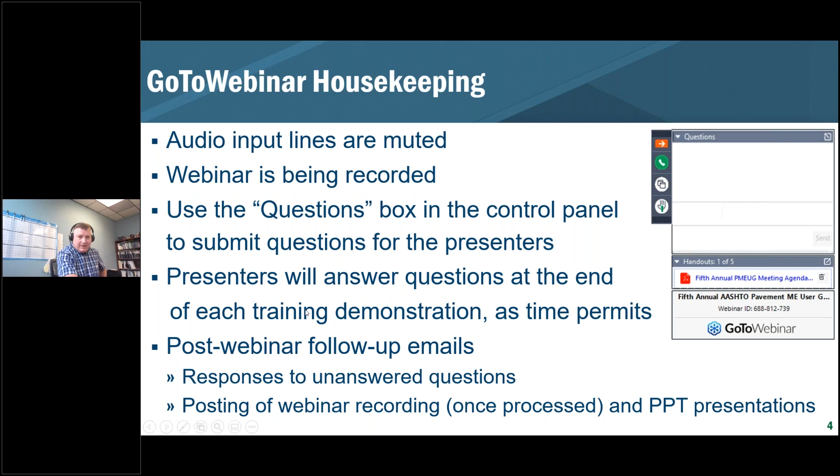All right, do you see my screen yet, Kelly? We see it, yep. All right everyone, I'm going to turn off my webcam just to save some bandwidth. I'm a little slow these days on that, so I'll be back.

What I wanted to do is go through and, as Kelly noted, highlight using the Pavement ME design procedure to look at cold in-place recycling as well as full depth recycling, full depth reclamation.

As we know, going through the asphalt overlay options, we'll be taking a look at the existing asphalt pavement, both a flexible and a semi-rigid type of process. I'm not going to get deep into the technology itself, the whole cold in place recycling process or the full depth reclamation process, but I want to cover some terminology and verbiage that we'll be using in a couple different places through the presentation.

Cold in place recycling is the recycling of the asphalt layers, typically to a depth of 3 to 6 inches. A train comes along, mills up the material, puts it through some type of a pug mill process, and then lays it down with a paver.

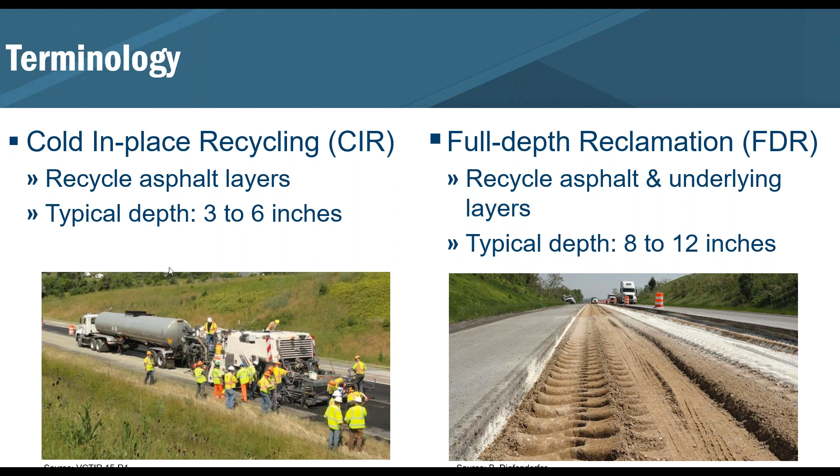The third one we'll be using is the cold central plant recycling, or CCPR. This is the classic process: do the milling, take the asphalt millings to the plant, go through processing, add materials or binder or do something to that material, and then bring it back out onto the project site and lay it down with a normal asphalt paver. So those are the three terminologies we'll be using through the presentation. I won't get into a deep dive, but there's certainly a lot of information out there for anybody wanting to know more about that technology.

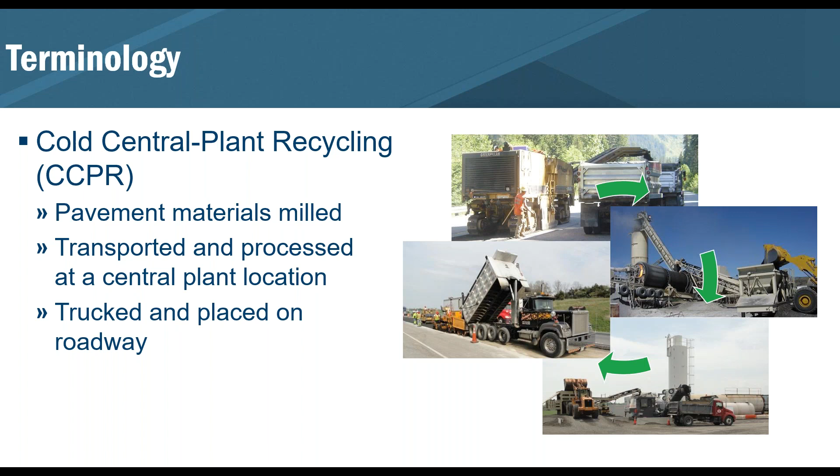As Kelly already noted, both Brian Diefenderfer and Hari Nair gave us a lot of information. Hari provided us with the DGPX files that he did as part of version 2.2 with Pavement ME, so there'll be a little bit of difference here, and I'll show you that in a minute. They also provided the Virginia DOT Pavement ME user manual they developed back in 2017, as well as Brian's report on the I-81 recycling project, which we'll use as our case study in this evaluation process.

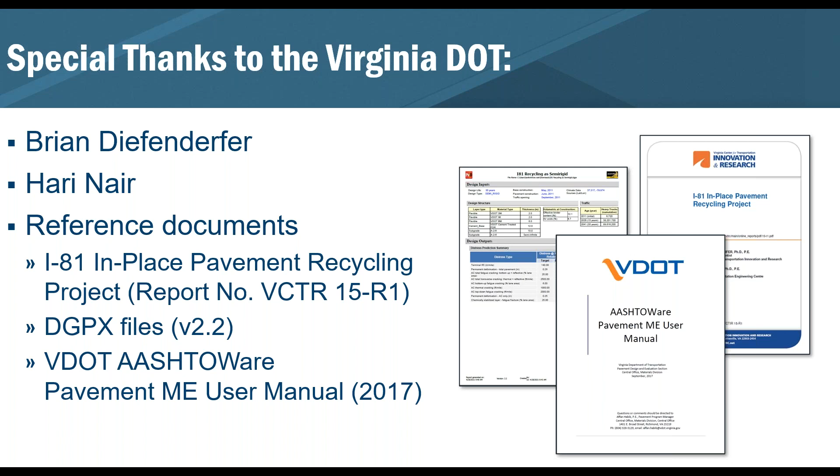With that, we'll dive right into the project itself. It's on Virginia Interstate 81, southbound lanes only. It's a rural interstate, four-lane divided, with pretty narrow inside shoulders and typical 8 to 10 foot outside shoulders. As noted, this is a recycling research project because the Virginia DOT wanted to look into the benefits, practices, and performance of all three: FDR, CIR, as well as CCPR.

This recycling research study was done in 2011, so that gives us some benefit, especially coming on the outside end, being able to compare how Pavement ME actually was able to predict performance, or how the current performance compares to the predicted performance. I've got a couple slides on that to show you as well.

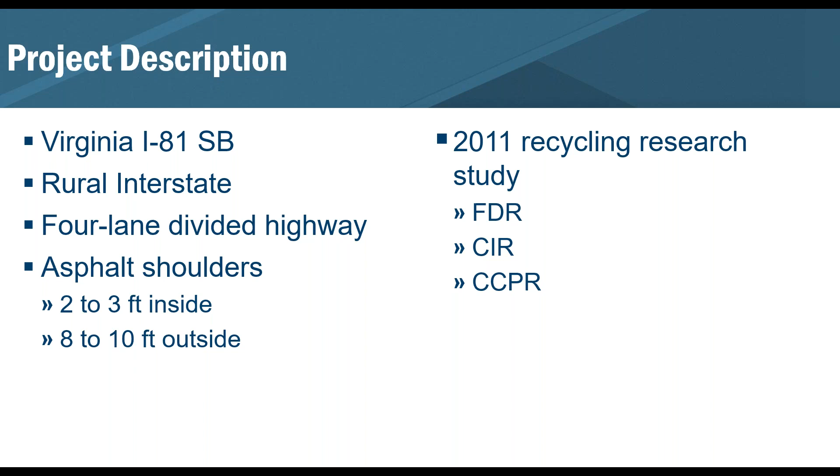The project location is just west of Richmond, over by the city pronounced Staunton - not sure if that's how it is, so excuse me for anybody on the East Coast. It's on I-81, running just outside the town, so kind of close in but still pretty rural. Here's a shot of the typical roadway configuration: you can see the asphalt narrow shoulders on the left, pretty standard on the right, a divided highway in a pretty rural setting.

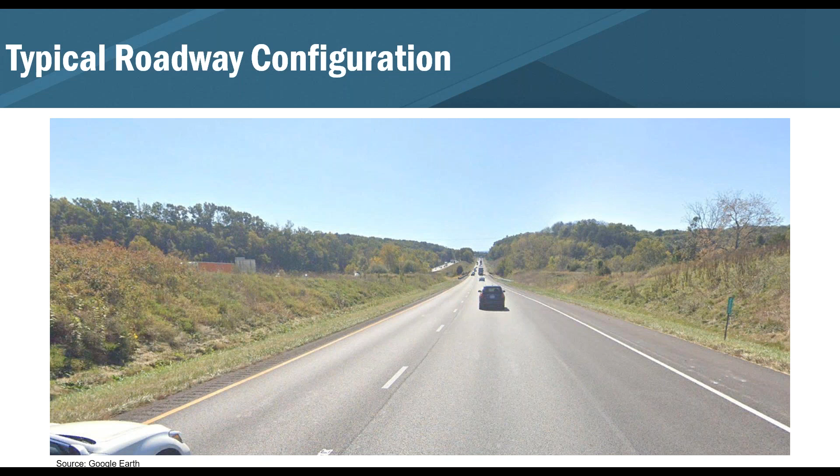Some of the existing conditions: the pavement itself was about 10 to 11 inches of asphalt sitting on top of about 6.5 inches of aggregate base. Back in 2011, there were about 13,000 trucks, both two-way, and about 90% of the trucks were in that design lane.

Based on the evaluation that the Virginia DOT did, they were having some pretty recurring structural issues with this section of highway. They had a lot of deep patching, a lot of mills and inlays, and it was kind of perpetual - they would fix one, come back and have to fix another section. So it was a reoccurring issue, and they decided on the project level evaluation that this section of roadway really was a candidate for reconstruction.

Here are some looks at the typical distress prior to the rehabilitation, back in 2011. You can see a patch on the left that has a series of potholes in it, with quite a bit of fatigue cracking in the patch as well. The image on the right - I thought, wait a minute, that's like a mill and inlay, but now it's actually a patch of a patch type of thing. You can see the fatigue cracking coming up pretty nicely in the right wheel path, and actually showing some staining, so we're getting some fine material coming up through the subgrade. That means you're pretty guaranteed those fatigue cracks run through the entire depth of the asphalt layer.

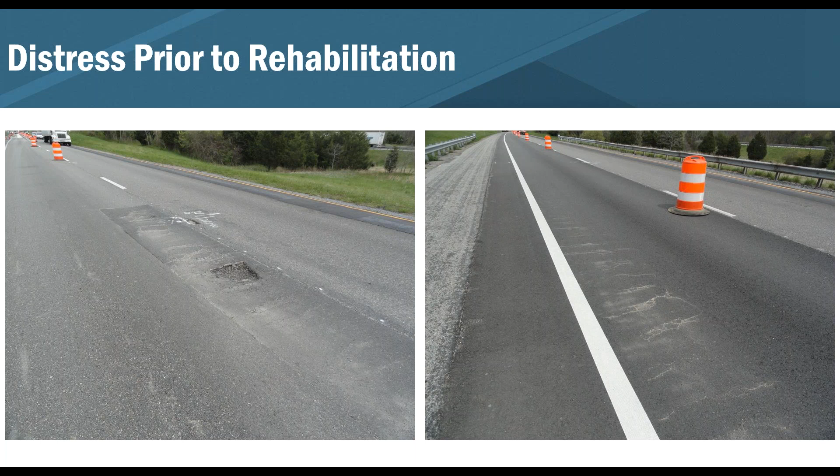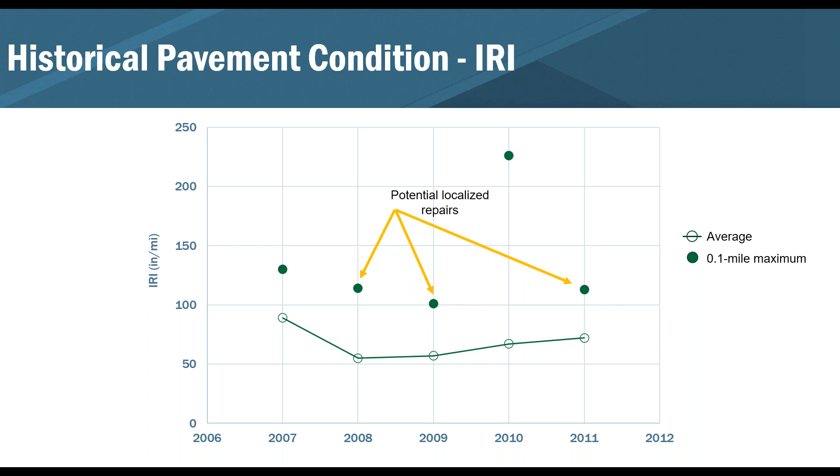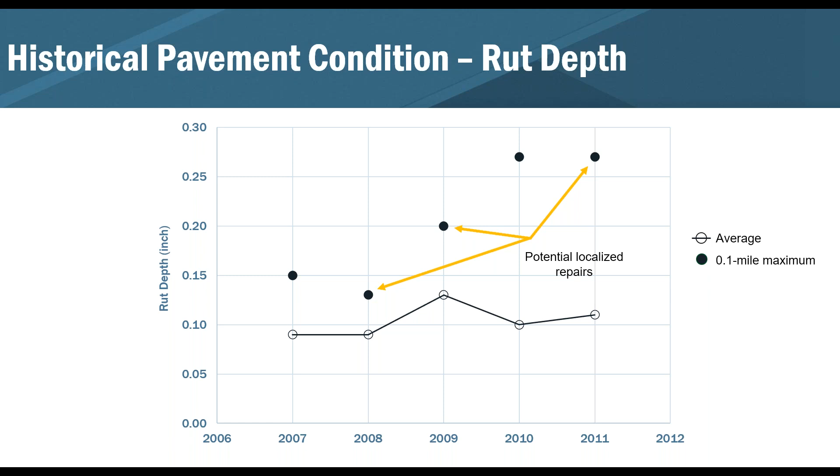And then finally, looking at patching and cracking, this one gets a little bit more messy. But the patching are the circles, and the alligator cracking are the triangles. Again, the marker filled with a color is actually the maximum value, and then the dashed line and the solid green line was the average value.

So again, you can kind of see that for the most part, the alligator cracking on average wasn't terribly bad - maybe gets up to a couple percent over the years, but certainly the maximum at one location in 2011 was above 10%, a little bit closer to maybe 12, 13%. Then again, the patching - you can see quite a bit of patching happened in 2007. They went through and did some repairs, and that drops and kind of fluctuates a little bit more so, depending on what they did.

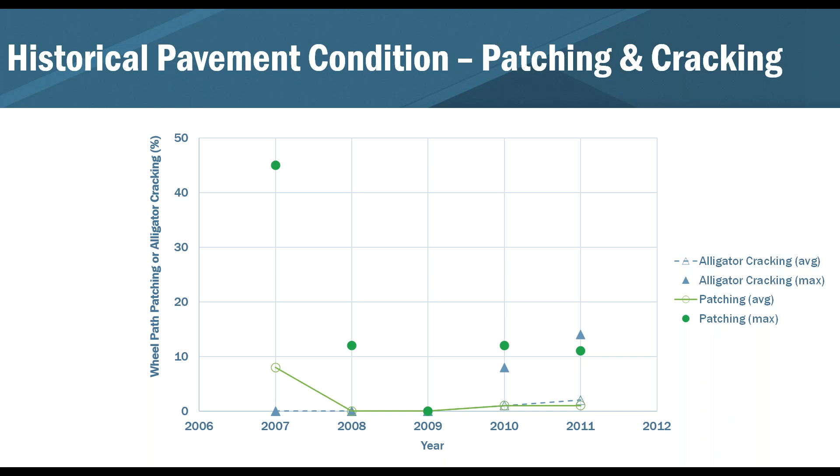All right, so let's dive a little bit into the Pavement ME inputs. This is some of the information that Hari had provided in his version 2.2 analysis of PMEd, where looking at also the Virginia DOT identifies the reliability values they use, much like everybody on functional class, where the interstate would be 95%, and then you can kind of see how it reduces depending on that down to secondary at 80% reliability.

They also make a note in their manual that, hey, if you're going to use FDR, go ahead and take a look at the 50% reliability. And so even though I'll show you at 95, I'll also provide that information at 50%, just so you can see how the analysis happens.

The other thing is that the Virginia DOT pretty much just takes a look at the bottom-up fatigue cracking and the total pavement permanent deformation as the criteria that they're going by. Obviously they're looking at it all, but they're really kind of focusing on making sure that they meet those two criteria in the analysis process.

Now, one thing that we did here, we did have a version 2.3.1, and so even though Hari had done it under version 2.2, the analysis that I'm going to show you is based on version 2.3. The 2.2 file format doesn't work in version 2.6, and so Kelly was gracious enough to do all the runs for me because he had an active version 2.3, and so that's what we used through the analysis.

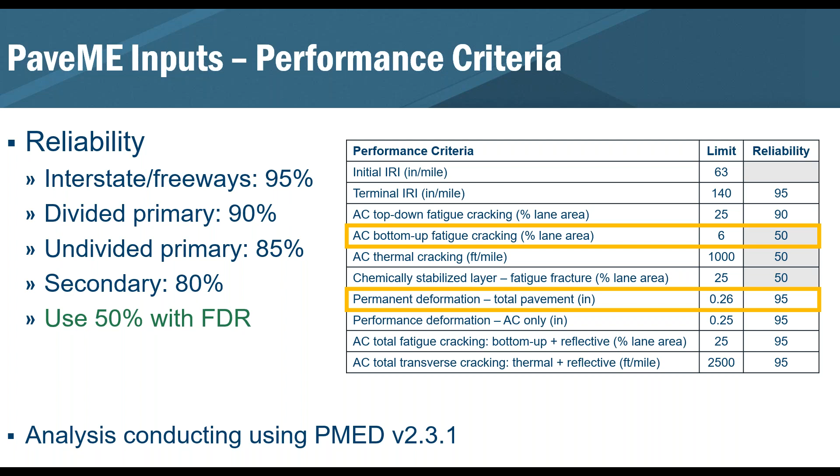So again, as before, we're going to show you more screenshots of the software, with a bit more discussion on the results. Hopefully anybody needing training on how to operate the software can go check out AASHTO, where there are a lot of videos you can download if you want to know how to run the software. That's something we've tended to do in previous years, as well as in this session and the last one.

So this is just the standard. Virginia DOT has vehicle class distribution by project, axles per truck by project, and all the average annual daily truck traffic information is something they put in, and everything else they use a default value. So that was the whole point of showing you that screen.

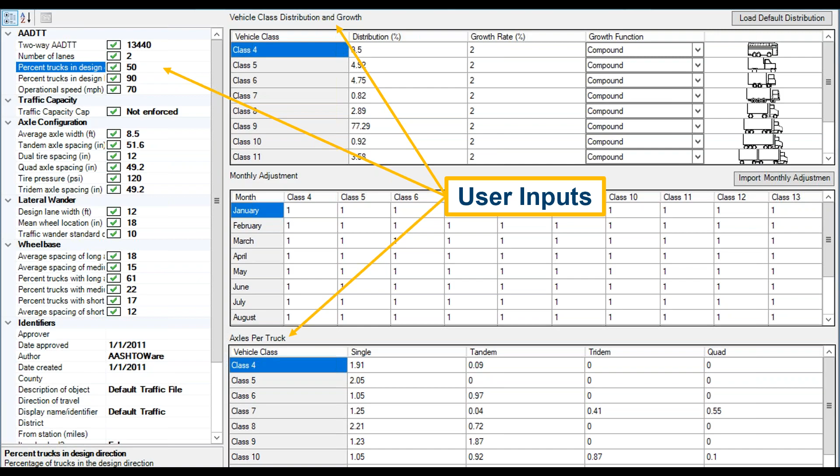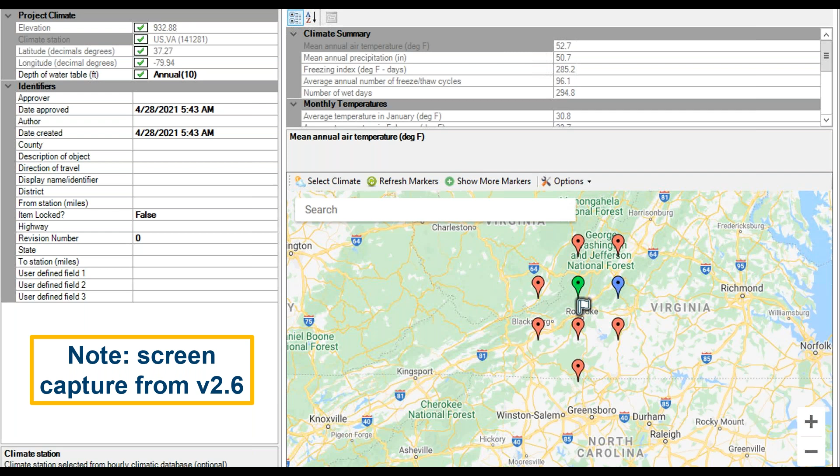The project location, like I said, is over in the Roanoke area, maybe by that little flag on the screen. This is not from version 2.3.1, but a screenshot from version 2.6, just to show you some of the climate summary information, more so than what they show in version 2.3, because I think in that version the map isn't there. I just wanted to show where it's located, so we get a good sense of where we're at.

All right, for the analysis of the FDR, there are a couple of different options you could do. You can design it as a semi-rigid layer, or you can design it as a stiff unbound layer. I'm going to go through both of those processes in the next couple of slides.

But before we do that, we have a poll question for everybody. Prashant or Kelly, if you guys could pull up that poll.

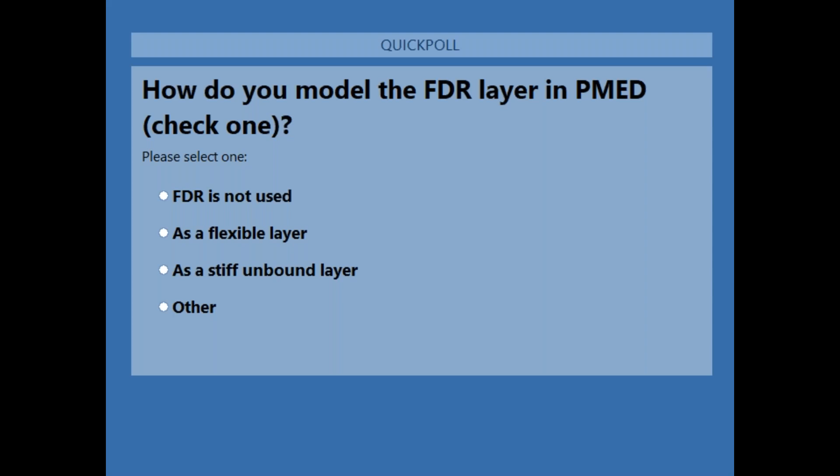And Kelly, I can't see anything. Oh, I was just going to say, it is being shown, and people are encouraged to respond to the question shown. Again, just wanted to see what everybody is using in regards to the FDR layer in PMED. So make your voices heard. Prashant, are we getting some good feedback? Yeah, we are at about 65% response rate, so I'm going to give it 5 more seconds and then close it, and then I'll show the responses. Great. And can you see the results, Linda? I can. Okay, I'll let you go through it a bit if you want.

Okay, great. Thank you everybody for responding. It looks like about 22% of you say that you do not use full depth reclamation. About 38% model it as a stiff unbound layer, 28% as a flexible layer, and 12% as other. So that'll be kind of interesting. That's some good information.

Thank you, Prashant. Thank you, Kelly. So let's dive into using FDR as a semi-rigid layer.

So the pavement section that we're going to evaluate is a 2-inch SMA, 4 inches of surface mix. Then Virginia put in—they recycled 6 inches of the material for the CCPR. So they hauled it off, recycled it, brought it back, and modeled that as an asphalt layer, but as a base mix, one of their asphalt base mix layers. There is the recycled 12-inch FDR.

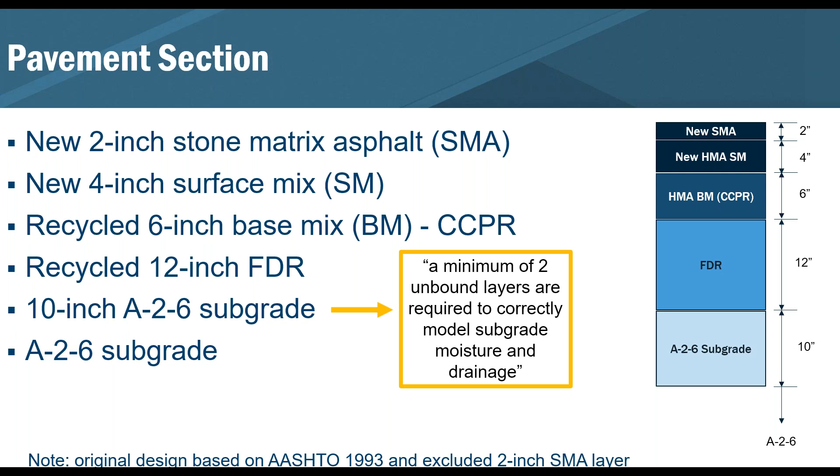All right, so we're able to have Virginia send us material properties. We have level 1 material properties for the asphalt, the CCPR layer, as well as the FDR layer. This is to show you those inputs for the binder test and for the dynamic modulus, and you can kind of see the stiffness values there.

So it's good information. If you've got level 1, use level 1 - that's always been the case that everybody has been supporting. So since we had that data, obviously we're going to use it.

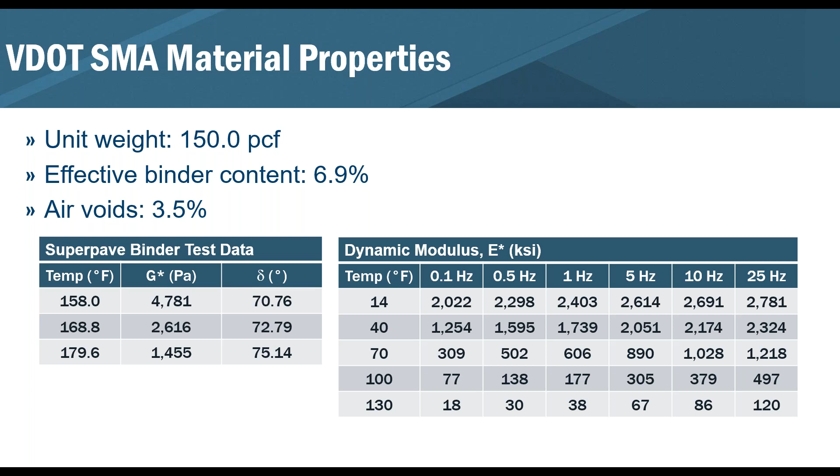Similar on the surface mix layer, we've got pretty good values there for that - 12% binder content, 6.7% air voids, and then obviously the binder test and the dynamic modulus test results.

Then on the CCPR layer, same thing here. Now the effective binder content drops down to 9.8 with the air voids at 6.3, and again still showing pretty nice results. The dynamic modulus itself is still looking relatively good compared to the other two as well.

For the FDR layer, we went through looking at different inputs, and pretty much the DOT uses an elastic resilient modulus of about 7,500 KSI, or 750 KSI - this is straight from what Virginia does. But the ACPA, the PCA, and the National Ready Mix actually have a program, pavementdesigner.org, where you can get it, and they suggest 600 KSI. So for anybody not really knowing how to characterize that, certainly the 600 KSI is a good place to start for those values.

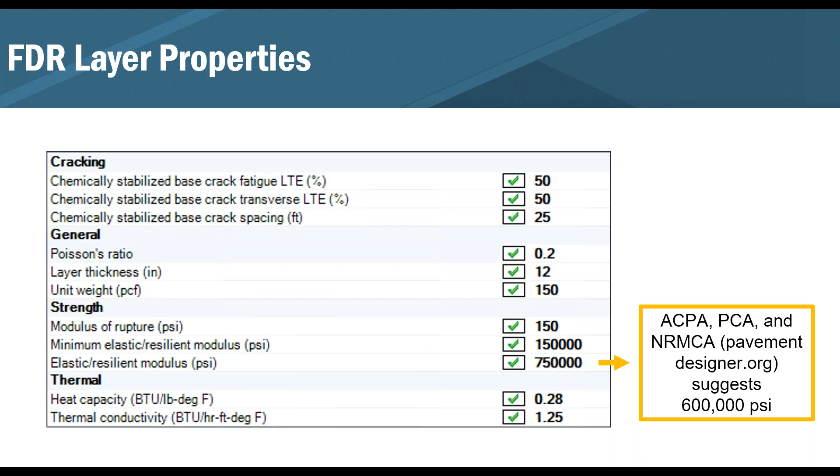On the subgrade side, we had to take off that top 10 inches of the subgrade layer so we can get the PMED to run, but you can see that everything is exactly the same - really it's just 10 inches. Poisson's ratio is the same as the subgrade, stiffness is about 16,000 psi, and it's an A-2-6 soil. Again, that's just to get the program to run, not necessarily that you're actually building a separate layer.

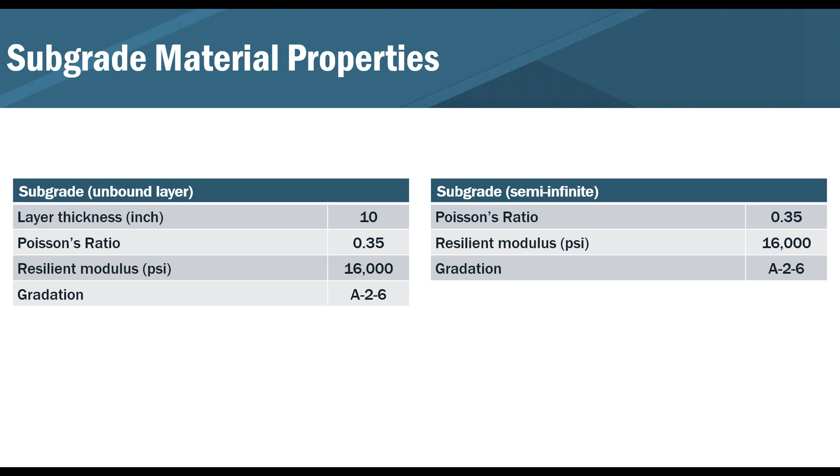All right, so some of the results, looking at it as a semi-rigid pavement for the FDR, looking at the predicted values at 95% reliability. Kind of missing out on the IRI - it's quite high. But if we focus on what Virginia DOT is looking at, it's the rut depth, and at this pace it's about twice what they're wanting it to be. But if you look at it at 50%, the rut depth is only 0.26, which does pass the reliability value at that level.

Also, the bottom-up fatigue cracking passes - it's actually quite low. Target is 6, and the predicted value is only 4.3. And then looking at it, the majority of the total asphalt rutting is predominantly what's driving the total rutting. So it's all pretty much in the asphalt layers, and very little of it is in the underlying layers.

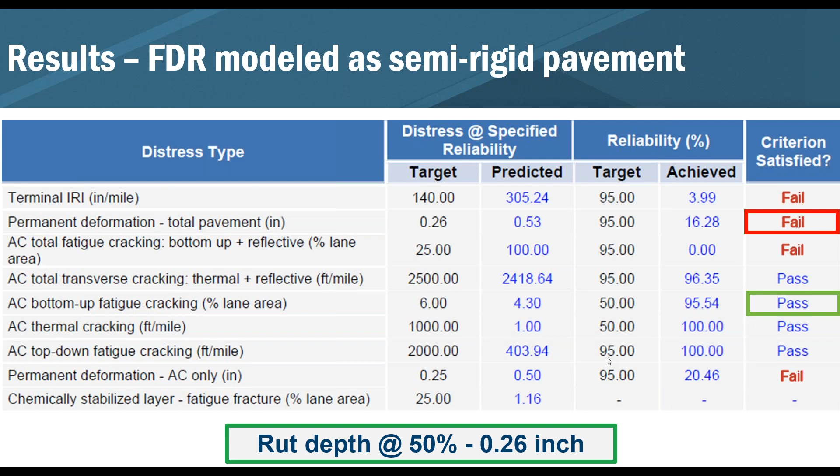All right, so now looking at it as a stiff unbound layer, and I'll do some comparisons at the end as well - kind of a similar type of structure. Again, 2 inches of the SMA, 4 inches of the asphalt surface mix. The recycled layer is still an asphalt base material. Now we're going to model that 12 inches of FDR as a high modulus unbound aggregate layer, sitting on top of the A-2-6 subgrade.

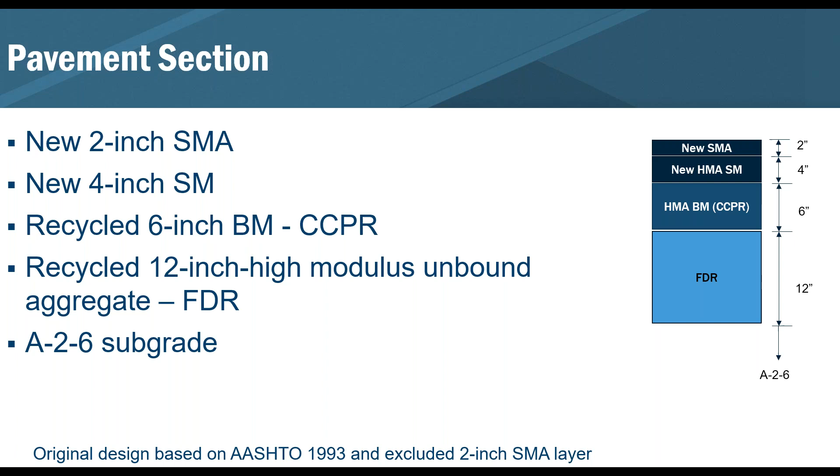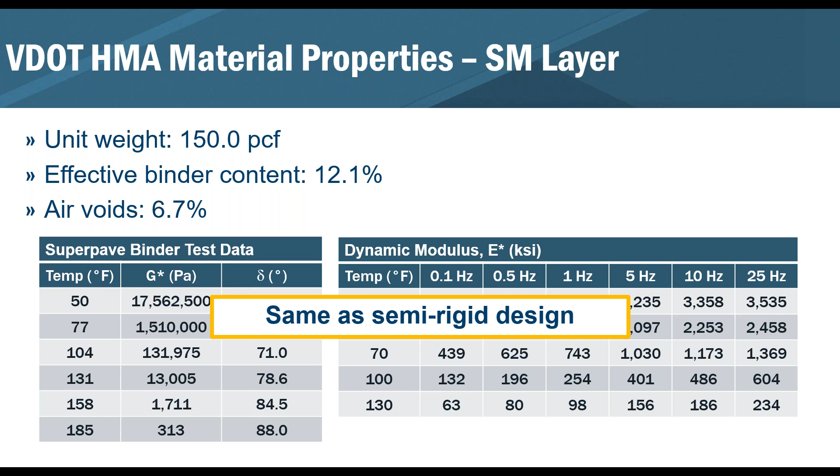Won't bore you again with the same details, but the SMA material doesn't change, the HMA surface mix layer doesn't change, the CCPR layer we're using the same stuff. But now on that FDR layer, we're using a Poisson's ratio of about 0.35, putting in 80,000 psi for its resilient modulus, and making it an A-1-A soil, just to give it a little bit more unbound characteristics. But it's probably not statistically different from just running it as the regular A-2 soil that was before.

The results from that analysis showed that the predicted IRI actually dropped quite a bit, but certainly the permanent deformation is still failing. It's actually the same as it was for the 95% as it was previously, but at 50% reliability, it's a little higher at 0.36.

And certainly the bottom-up fatigue cracking again is failing - even though it's barely failing, it's 6.1 or 6.2% predicted versus the 6% target. But at 50% reliability, it does pass with only 4.3% fatigue cracking. And again, same thing here, the majority of the predicted permanent deformation is occurring in the asphalt layer, with very little of it happening in the underlying layers.

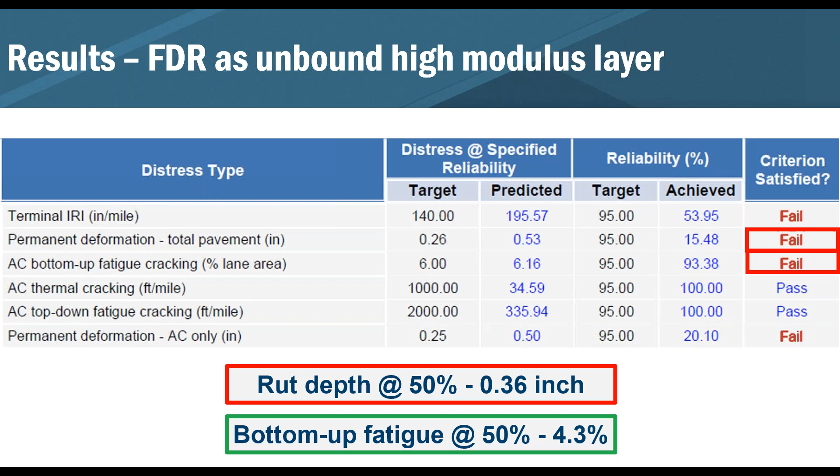So I don't think that's anything surprising from what we know happens. So here's this comparison of the analysis, again just doing the side by side.

With the unbound layer, there is no bottom-up plus reflective cracking, or thermal plus reflective cracking, or fatigue fracture of the cement stabilized layer. So that's why there's an NA in that column. But you can see where I showed before that the terminal IRI is different between the two, and certainly it is impacted by the reflective cracking, because some of that information is coming through. The target was 25 for the FDR as a semi-rigid layer, but actually it predicted 100, so all of the cracking coming through is being mostly driven by the reflective cracking.

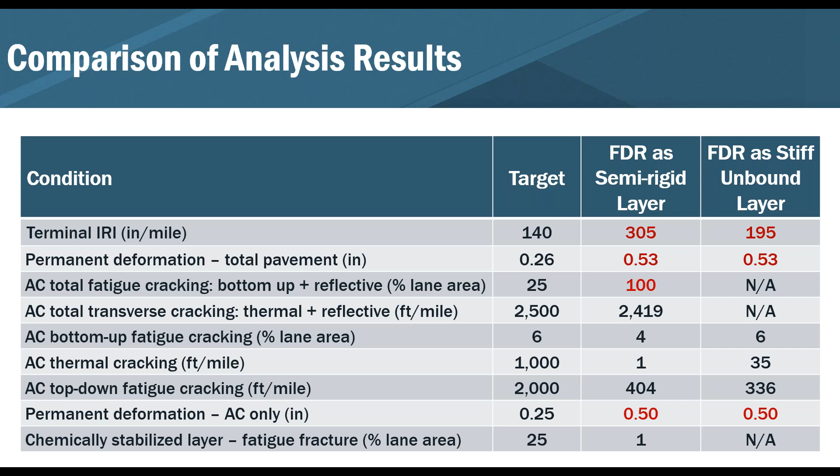The great thing about having this project built in 2011 is that while the PMED analysis was obviously done recently, we do have measured data. Hari was able to send me information related to IRI, rutting, as well as fatigue cracking. So the benefit, of course, is you can now compare the prediction versus the measured. But also the challenge, as you see here, is trying to figure out what happened, and how well the measured fits the predicted.

I'm going to show you these. The next 3 slides are all the same in that the measured is lower than the predicted, and there's probably a whole bunch of reasons why that is true. But I think that would probably take a whole other training session on calibration and application of results, and whether or not this needs a more forensic type investigation to determine the cause. There's a couple reasons that there could be this divergence between measured and predicted, but we can dive into that maybe at a later date.

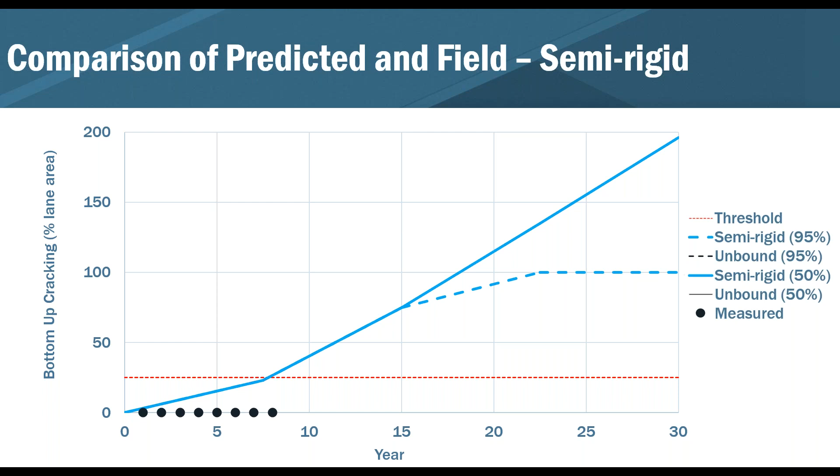So this is for the semi-rigid case. For the unbound case, it's slightly different in that the bottom-up cracking is completely related to fatigue. There is no reflection portion of this. And you can see, again, even though the bottom-up cracking is lower, it's still slightly higher, twice as high I guess, than what is actually being measured. So again, that's something to look into, to see how come that's not tracking as well as we would hope it to be.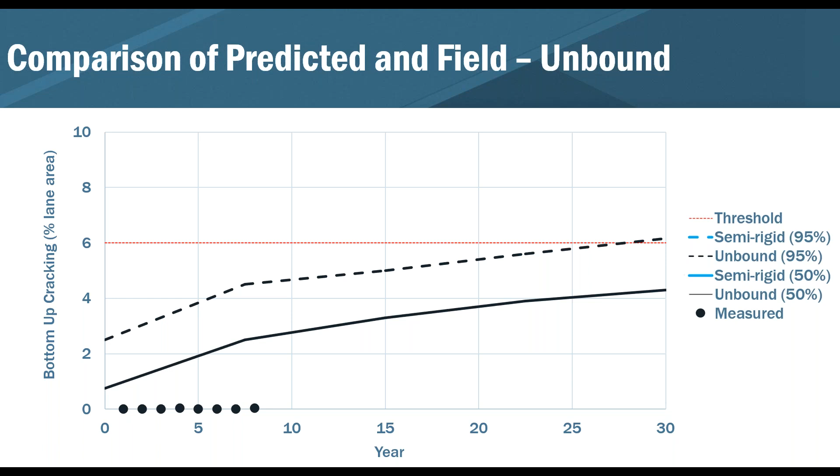All right, so having the ability to run the most current version of PMed, I went ahead and did that this morning, so this is hot off the presses. I used version 2.6. I went ahead and evaluated one case modeling the FDR as a stiff unbound layer, using the global calibration coefficients.

I should have mentioned that with version 2.2 from Hari, and version 2.3, all the runs we did actually used the Virginia DOT calibration coefficients. So now going into version 2.6, those calibration coefficients no longer are the same. So I just went ahead and abandoned all the calibration coefficients we received from Hari and went with the global calibration coefficients for version 2.6.

So is it a direct comparison? No, because it's not calibrated to Virginia conditions. But I think it gives us a sense of what the new version looks like, how the new version would perform in this analysis.

So for version 2.3, I put both the 50% reliability and 95% reliability, and the same for 2.6, so you can see that here. Since there is no reflective cracking in the unbound layer, you don't see that here. I'm also only showing information on the 50% for the 3 criteria I used on those graphs I just showed - IRI, permanent deformation, and bottom-up fatigue cracking.

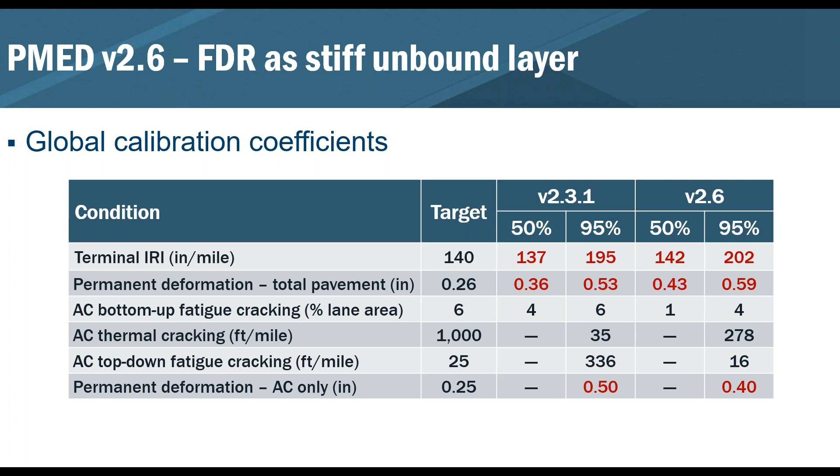All right, now I'm going to dive into the evaluation of a cold in place recycle project, but I'm going to pause because we do have another poll question for you.

So Prashant and Kelly, and Linda - I was just going to say, we've got only a few more minutes to go on your part of the presentation, but there were a few questions on FDR. Do you want to pause just a little bit and take a couple of those questions, or just wait till the very end? Yeah, why don't we, Kelly? Why don't we wait till the very end, since I don't have very many slides on CIR, and that way we can just go from there. And if we don't have time, I can see if I can respond to them, and Julie can go ahead, so we don't slow that process down any. Okay.

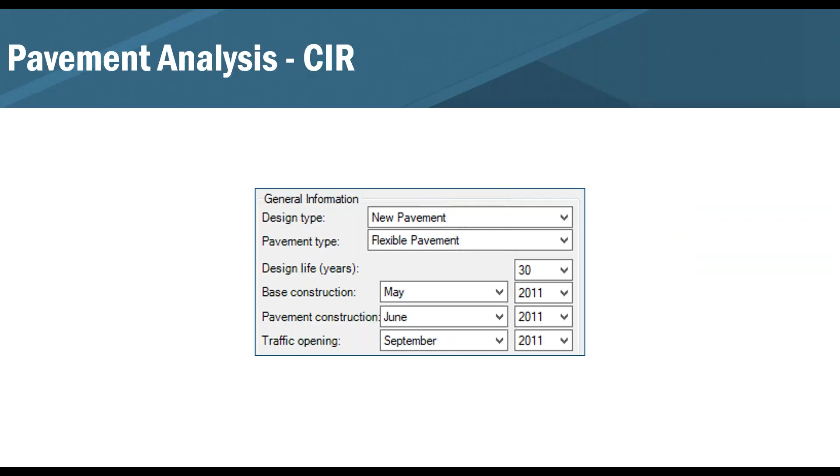We do have CIR properties from Virginia, so we'll just leave that as is and go straight to the results. As far as IRI goes, it really didn't matter, which I didn't expect it to, whether you put in a 4-inch or 6-inch surface mix, or a 4-inch or 6-inch CIR layer. Again, I don't think that's surprising to anybody.

The same with the permanent deformation. The rutting is not terrible, even though it doesn't officially pass the reliability check. I would call that good, it's only 0.05 of an inch difference. So in my book, that would be close enough.

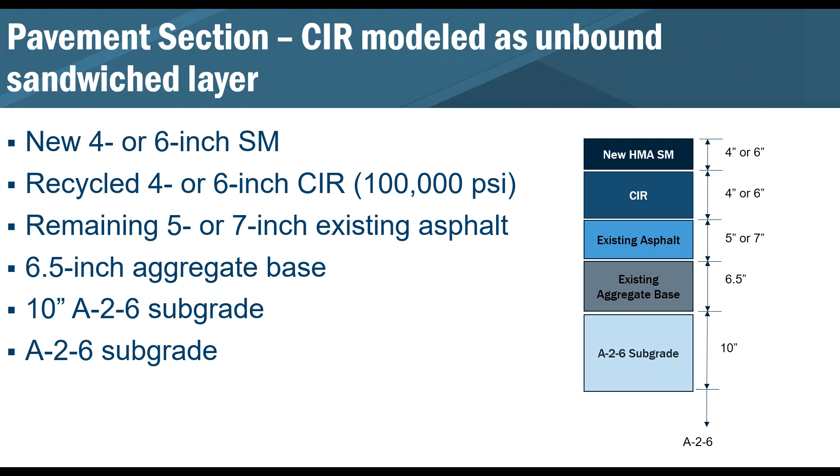All right, then if we go and model this as an unbound sandwiched layer, again still either 4 or 6 inches on the HMA surface mix. We varied the CIR layer to either be 4 or 6 inches, but we modeled it as 100,000 psi for its resilient modulus. Same remaining asphalt, same aggregate base, everything unchanged in that regard. And here's the results of that.

Looking again, IRI is actually quite a bit higher, again it's higher than it was if you modeled it as a stiff layer. But it's still not different depending on what you put in as far as the thickness of the asphalt layer or the thickness of the cold-in-place recycled layer.

Same with the permanent deformation, it's higher but it doesn't change from one evaluation to the next. The bottom-up fatigue cracking is quite a bit higher than it was, actually twice of what was in the previous. And again, the total rutting is again showing that it's mostly in the asphalt layer.

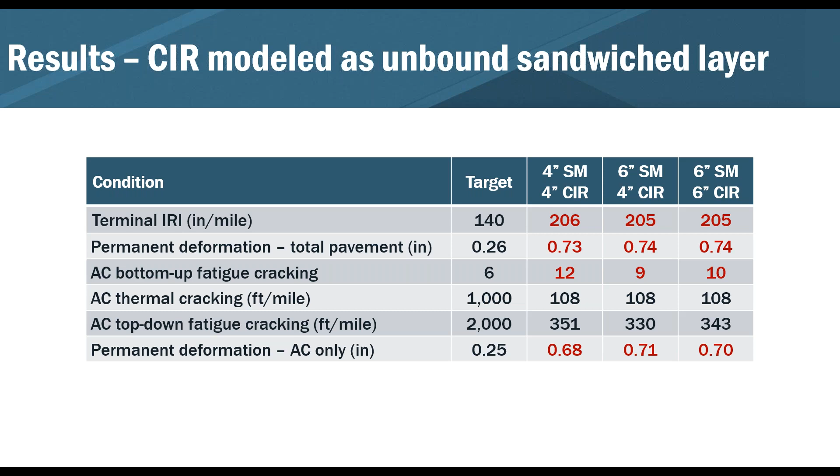One thing that we did find is how other agencies model the CIR layer. We were able to find information from both Colorado and Manitoba. Colorado actually did a study looking at field performance. They did a whole bunch of lab testing to quantify the CIR layer and a number of PMED runs. They pretty much found in laboratory testing that the CIR is about half the stiffness of the asphalt dynamic modulus, and they actually suggest that you model CIR as an asphalt layer. Manitoba kind of went through the same process.

They actually looked at it both as a stiff layer, an asphalt layer, and as a sandwich layer. But they found that when running the PMED results, it showed that the sandwich layer had unrealistically high overlay thicknesses, whereas when they ran it as an asphalt layer, it came to be more reasonable as far as the overlay thickness.

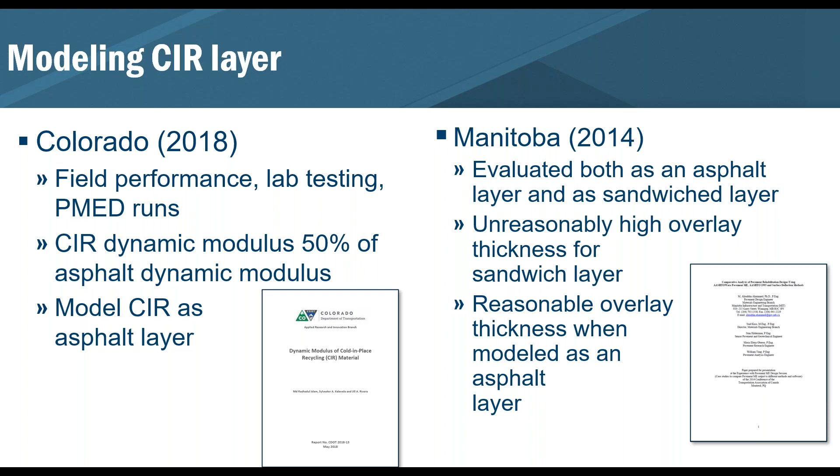So the moral of that story is if you've got a CIR, the trend appears to be to go ahead and model it as an asphalt layer, at least based on the couple of studies we were able to find, and I'm sure there are others. This is by no means an in-depth reference review to come up with that conclusion. So with that, Kelly, I'm done.

Perfect. Thank you, Linda. Very good. We do have some questions, and I think we got one question on the CIR, so maybe we can attack it first.

The question is, in the CIR run, were the same HMA rutting models and calibration factors used to predict performance? Any thoughts on that, Linda? Yes, yes, they were all the same.

Okay, perfect. And now let's jump back to some questions on the FDR training. First one was, in order to get 80,000 PSI, was the resilient modulus test run on the FDR material?

I will have to check into that one. I'd have to see what they did. I'll have to go back to the reports. We'll get back to you on that one. I know that the Brian and Hari report involved quite a bit of testing on materials, but I'm not sure if that was one of them or not. So I would suspect it is, but like Linda said, we'll get back to everybody on that. Yeah, I would agree with you, Kelly. I would expect it is.

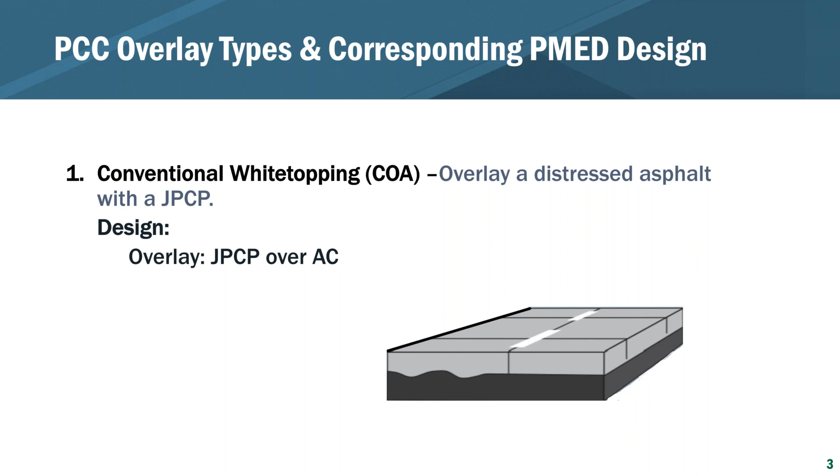So again, here we are with our overlay design options, and we're going to be looking specifically at distressed asphalt pavements, and that's where our focus will be. Just to get terminology correct, we're looking at a distressed asphalt pavement where we're going to put a jointed plain concrete pavement on top, or possibly a composite pavement, which I'll briefly talk about in a second.

With the distressed asphalt pavement, there seems to be a lot of confusion, and I frequently get questions about what's the difference between bonded and unbonded, and does it really matter. When you're selecting a design process, there are some things you'd like to consider. So which approach do I take?

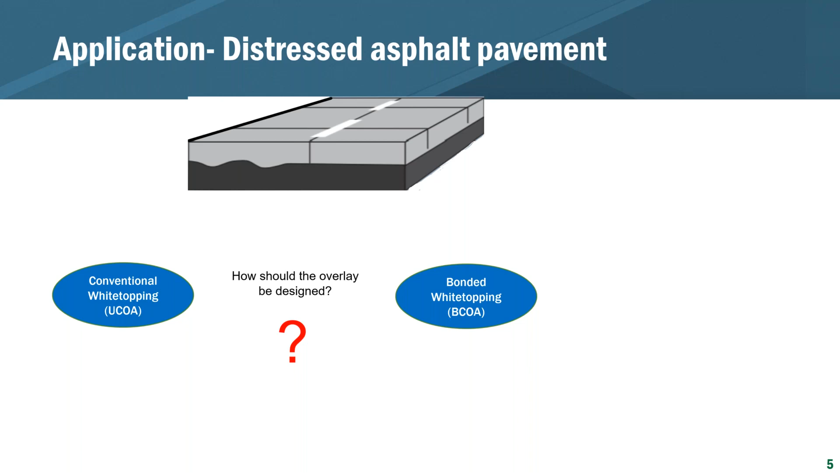It looks like I'm not able to forward my slide. Now it's going. So which approach do I take, and what design alternative should I focus on? How do I make that decision?

Well, it's going to be a function of the overlay thickness. And of course, as soon as you say it's a function of the overlay thickness, how can I design the pavement if I don't already know the overlay thickness? Just remember that, like with the 93 design guide, thickness design is an iterative process.

For example, if you're going back to calculating a K value, you need to know the thickness of the slab prior to calculating the K value. Or even if you're going back to ESALs, you also need to know the thickness of the slab. So you give a best estimate of the thickness, try the design, and move forward from there. It's somewhat similar to this process, and even in the design example I'll show you how it works.

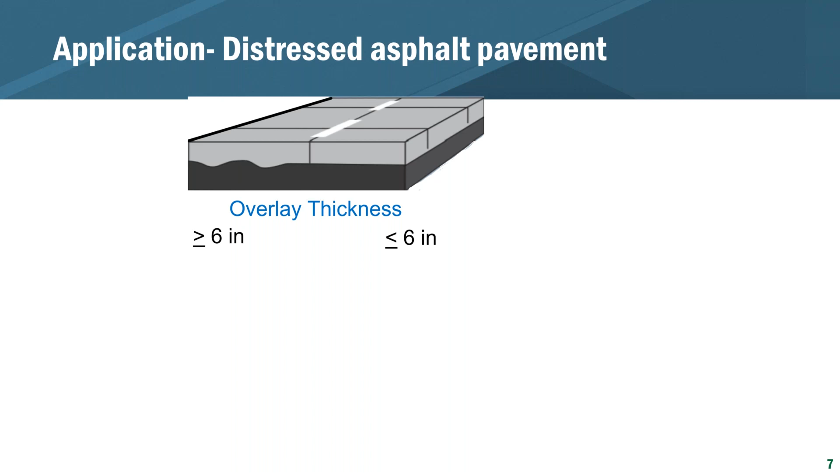With the overlay thickness, the critical value is 6 inches, and that's the turning point. When I'm doing a design and it comes out to about 6 inches, I'll design it both as a conventional white topping or conventional concrete overlay unbonded, and I'll also use the bonded methodology just to see where that gets me. So with 6 inches or less, that's the bonded concrete overlay.

The design tools then you can use the BCOA ME if you're looking at all slab sizes - the very small 4x4 or less, the trendy 6x6, or even full lane width slabs, for example 12x10 or 12x12. If you're doing short slabs, you have the Pavement ME that you can use with the short slab design option, or the Colorado design procedure, which was really the foundation on which the BCOA ME was designed.

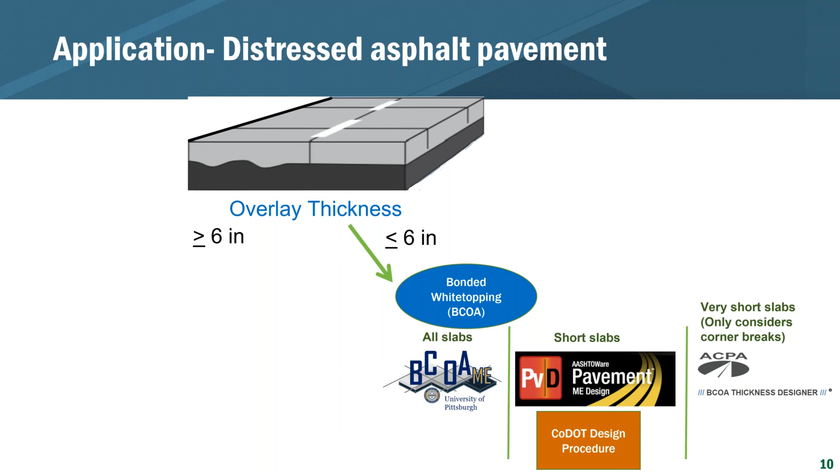And if it's very small slabs where you have corner breaks as your primary mode of distress, you can use the ACPA design procedure. So all of that we talked about in a previous webinar, but our focus on this webinar is when your thickness is at or greater than 6 inches, and you're going to be developing a conventional concrete over asphalt design. In doing that, you have two options.

You can use Pavement ME, and of course we've been using the 93 guide for quite some time. In the 93 guide, you're just designing a concrete pavement as if it was a new pavement on top of an asphalt base, much of which we're currently doing in Pavement ME, but there are some things Pavement ME can account for regarding existing conditions a little bit better than what we had in the 93 guide. So that's our focus.

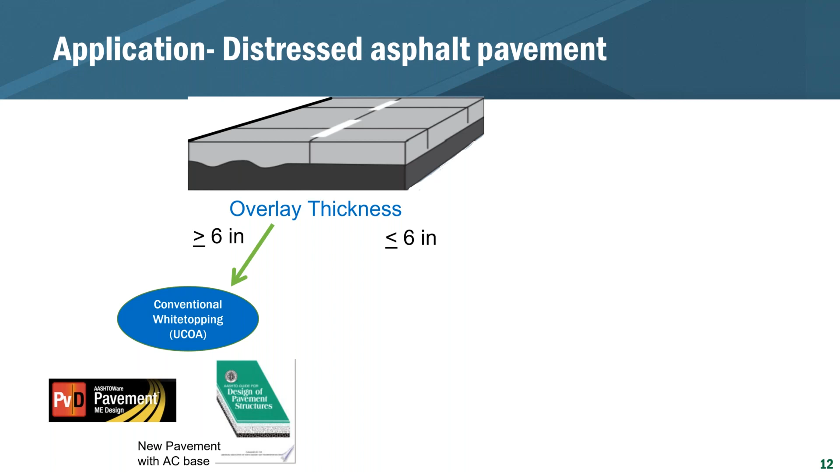I also wanted to mention distressed composite pavements. We talked about this a little bit in previous webinars, but you have the same type of thing. Now instead of looking at this as an unbonded overlay, or should it be a bonded overlay, or should it be just a conventional asphalt overlay, how do we design this? Again, you have to ask yourself first, this time, how thick is the asphalt?

Three inches is kind of your intermediate area, where you're probably going to go both ways. Typically, if you have an asphalt interlayer in a composite pavement, you'll mill the asphalt down to the thickness of the interlayer, leaving maybe 1 to 2 inches. Some people leave up to 3.

You get much more than that, and it's going to be responding a little differently. So if it's less than 3 inches, that creates a slip plane, and you'll design it as unbonded. We'll talk more about that in a future webinar. Here are some design tools: Pavement ME, Pitt UBOL-ME, which has some different advantages, and of course the 93 guide.

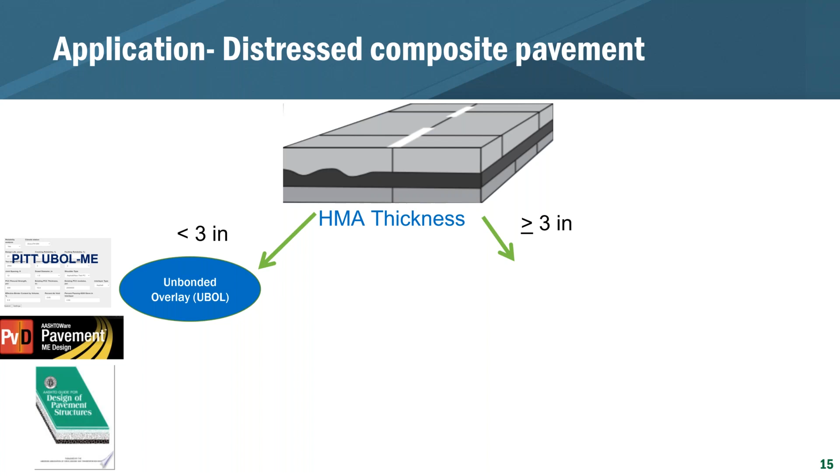But if it's greater than 3 inches, that can be designed as a white topping, because that layer acts not as a slip plane but contributes to carrying the load. So then again, do we go to a conventional design, or do we design this as a bonded concrete overlay? That's when we go back to the overlay thickness.

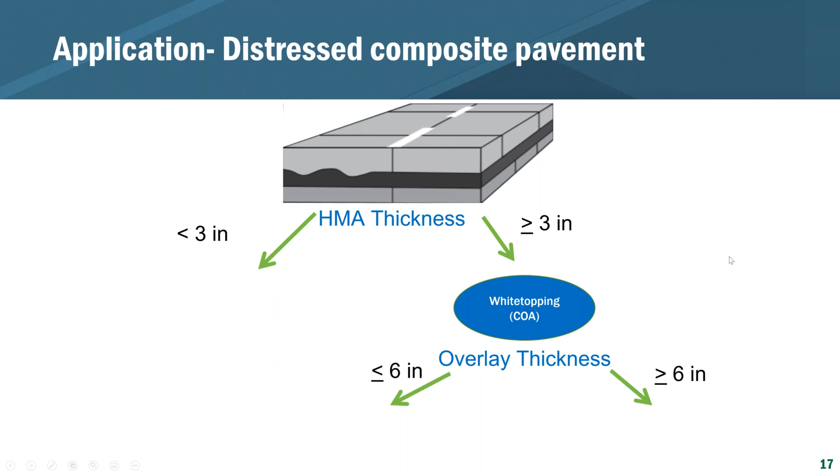If the overlay thickness is 6 inches or greater, we'll treat it a little differently. When it's thinner and we're going to engage that asphalt so it carries the load together, that's when we use the conventional bonded concrete overlay tools we just talked about. But if it's greater than 6 inches, then you're going to go to Pavement ME.

Or again, if you're using the 93 guide, it's a new pavement on top of an asphalt base. So it's pretty straightforward in how you climb down to what design tool you should use, but you want to have a little bit of an estimate of where you're going. And again, that's the whole idea of the design process.

If it ends up being a little thicker than you anticipate, you might want to go over and design it more as conventional, whereas if it's a little thinner, you might want to double check to see what it would come out as if you have a bonded concrete overlay.

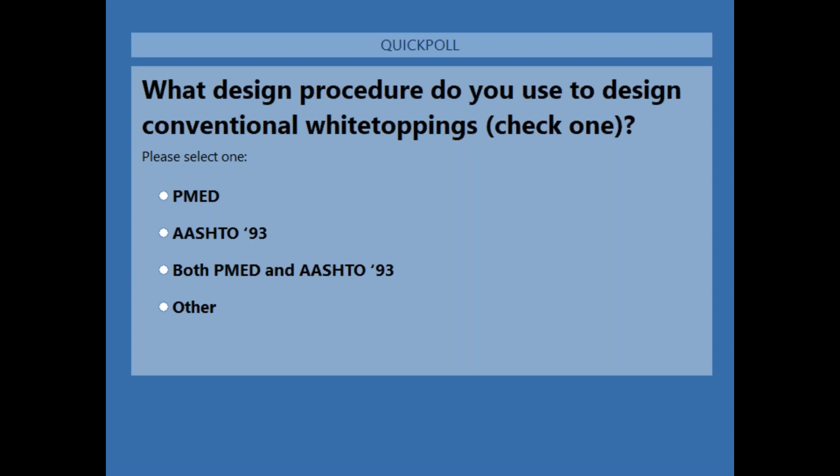Okay, we have some results. It looks like 22% are using PMED for conventional white topping design, 32% using AASHTO 93, and 20% are using both procedures, probably interpreting what the best design might be. Then 26% say other procedures. All right, those are poll questions 3 and 4.

Back to you, Julie. I actually like the fact that people are using multiple tools because they're all based on different conditions, and it's good to get an idea from different perspectives on what the thicknesses should be. So I'm going to now focus back on conventional white topping, or concrete over asphalt.

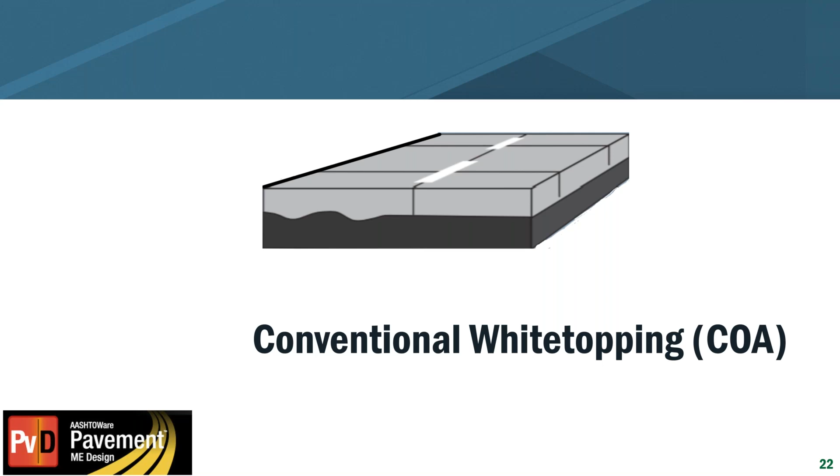With concrete over asphalt, this conventional white topping is thicker, and we're not relying on that bond. So the design philosophy is a little bit different.

I first want to talk about what the assumptions are within each design process. With this type of structure, you can design it as an overlay on top of a jointed plain concrete pavement over asphalt. The same type of design process is used for the short joint, and a similar process is used when you're using a new design in concrete over asphalt.

So looking at these three different alternatives, what assumptions are inherent with each? The big thing, as we talked about before, with slab thickness is if you're going to have a thicker slab, then that's more of a new overlay that you would design as jointed plain concrete over asphalt. In the overlay option, you go to the jointed plain concrete pavement over asphalt.

Within the short joint, you're assuming that's a 4 to 8 inch range. That's the window, and I would even venture to say 8 inches is probably a little bit outside the inference space based on the calibration database.

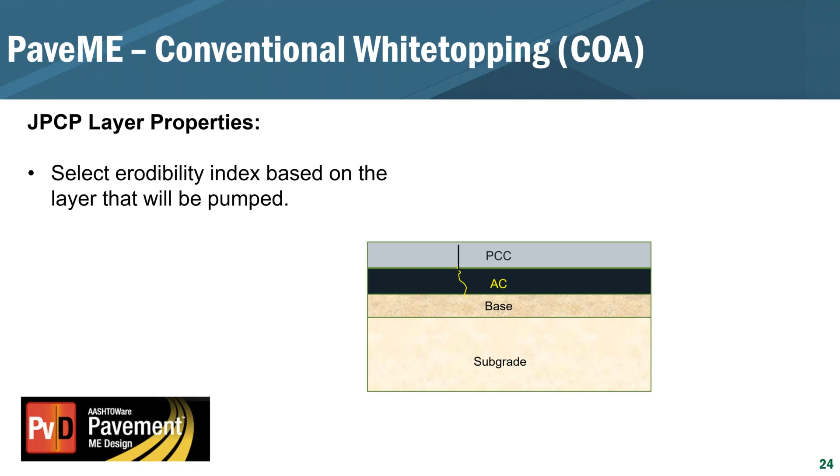If you look at some of the LTPP data, it supports this, where we have different concrete pavements on asphalt stabilized bases, and the erodibility of the layer below the asphalt layer plays a critical role in the development of faulting. So I think that's one important thing to see.

The other thing is that we have to define the friction for the pavement structure. As mentioned, through this conventional pavement, we're not really relying on the bond between the asphalt and the concrete, although it will be there because it's very easy to bond these two layers together. I'm sure Chris and Ben will testify to that - concrete bonds very well to asphalt, milled or not milled.

So the other thing is what's considered to give you a good prediction. The manual of practice recommends that you assume full friction between these two layers throughout the life of the pavement. So unless you have strong evidence otherwise, I would follow the manual of practice and assume full friction between these layers.

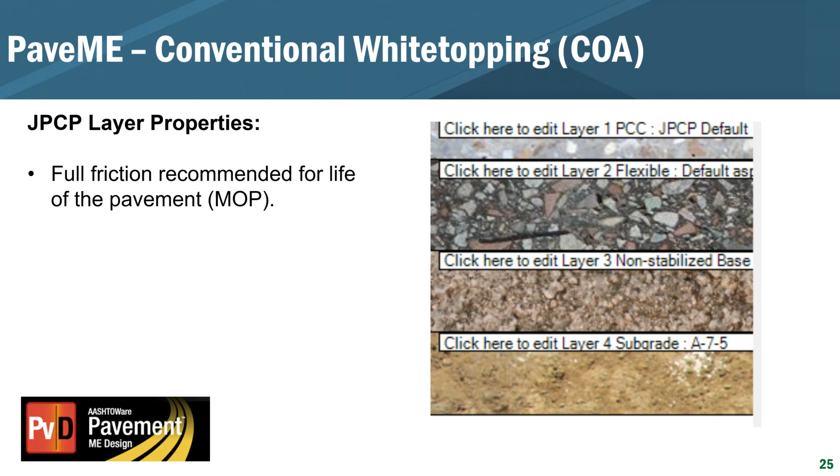Okay, so then we drop down from our overlay into that distressed asphalt layer. We have a couple of different levels that we can use to define the asphalt layers. The first thing you're going to do is put in the milled depth, and then you're going to put in the percent fatigue cracking.

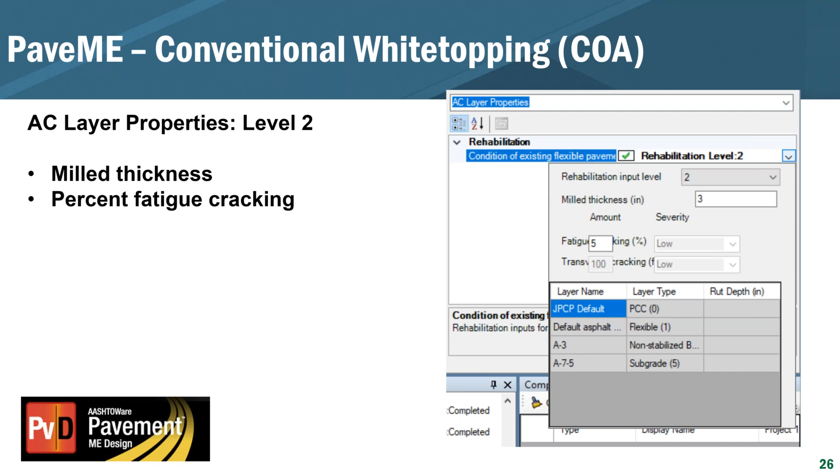With level 2 data, here's the drop down screen for that, and you can see that you can enter the percent fatigue cracking in directly. Now for level 3, you might not know the percent fatigue cracking exactly, but you have a general idea of where it's at.

And so with this, they have a chart included in the manual of practice, table 12-10, as you see here, the very bottom row. That's looking at the distress that you estimate - it's not that you went out there and defined it, but you estimate it's kind of within these ranges. And so this is your level 3. Again, the big thing about this is critical in differentiating the stiffness of that asphalt.

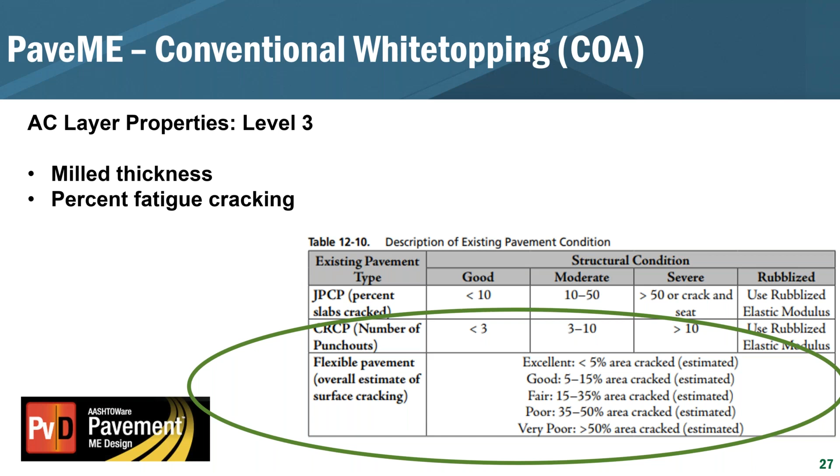So we're going to develop our master curve, and then based on the amount of fatigue cracking, we'll have a certain amount of damage imposed to that asphalt mixture, which will reduce the stiffness of that asphalt. How much it reduces is a function of the percent fatigue cracking. So either you're entering it in directly, or based on these 5 categories, it's going to provide you with an intermediate value and define it for each one of those. Again, we'll get back to that in a few seconds.

Another thing with conventional white topping in your overlay design, so jointed plain concrete over asphalt, is that you must have 2 layers below your asphalt layer. This can be important. A lot of agencies might say they usually have a base and sub-base layer or some type of select granular fill anyway, but in some of these thicker asphalt pavements, like throughout Iowa, these are full depth asphalt pavements constructed right on the subgrade. So even though it's asphalt directly on the subgrade, you will have to stick a base layer in there. In the example, we'll talk a little about how that can be done.

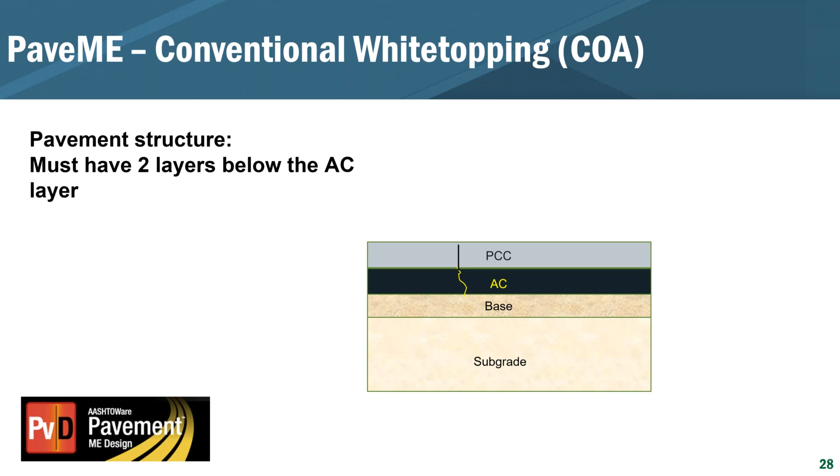Okay, moving right along to the project here. Again, thanks to Chris and Ben for providing us with the project information. This is a section on US 71 in Iowa. Based on the GPS coordinates, I think it's right about in this area, someplace between Sioux Falls and Mason City, just south of 90 there. As you can imagine, the climate up in that area - I'm sure the winters get a little chilly based on my experience living in Minnesota. So colder winters and then nice sunny summers. This particular pavement is a 24-foot wide asphalt pavement, again, placed directly on the subgrade.

The P200, they said, was about 50%. So it's a very fine grade subgrade with a K value of 100 PSI per inch. Just thinking about how these are being characterized, for each design process there are different inputs, but part of this example, I'll go through how I teased out the information that we actually need for Pavement ME with the information that was needed for a different design process.

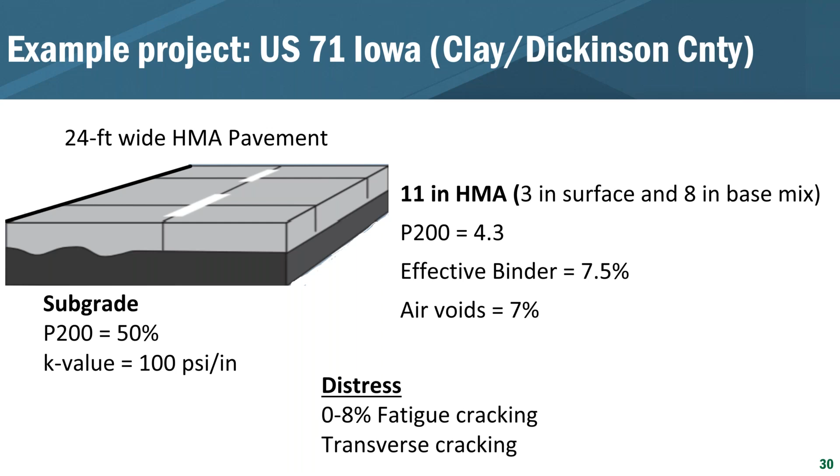Again, I'll mention the 24-foot wide pavement section, and we'll get back to that in a few minutes. Okay, so the traffic: the roadway classification was a major arterial. The two-way ADT was 4,800, with 10% of those being trucks. They had a design life of 20 years, assuming a 2% compound growth rate. So what's probably clicking in your mind right now is this isn't a lot of traffic. We'll go through the process, but this gets back to the question: should we be designing this as a bonded concrete overlay, or should we be designing this as a white topping?

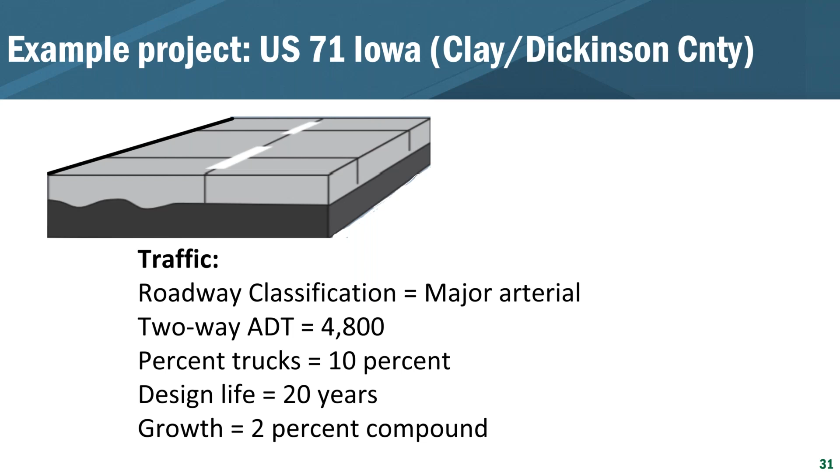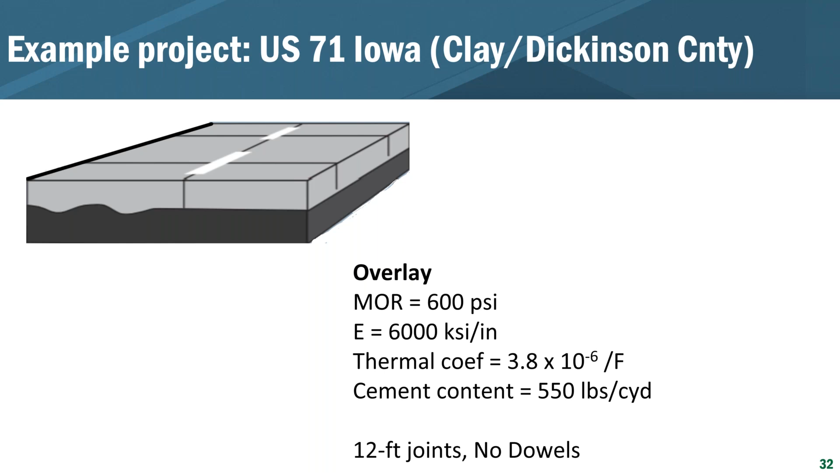The first thing we did then is look at what the properties of the overlay were going to be once they placed it. They used a 28-day modulus of rupture of 600 PSI. The elastic modulus is 4 million, not 6 million - another typo there, my apologies. The thermal coefficient of expansion was quite small, 3.8 times 10 to the negative 6 microstrain per degree Fahrenheit. The cement content was 550 pounds per cubic yard. Just for the sake of this design, I put 12-foot joints and also no dowels. So they were not going to have dowels in it, and we'll progress this way and continue on, and some of these other things will flush out as we go.

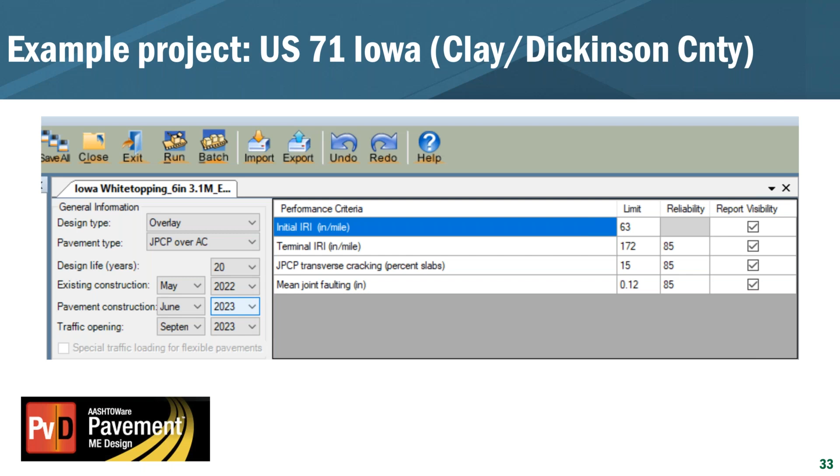Okay, so I used a level of reliability of 85%, and I'll circle back onto why I did that a little bit later. But again, the design type is going to be an overlay over a jointed plain concrete pavement over asphalt. So back to those layer properties.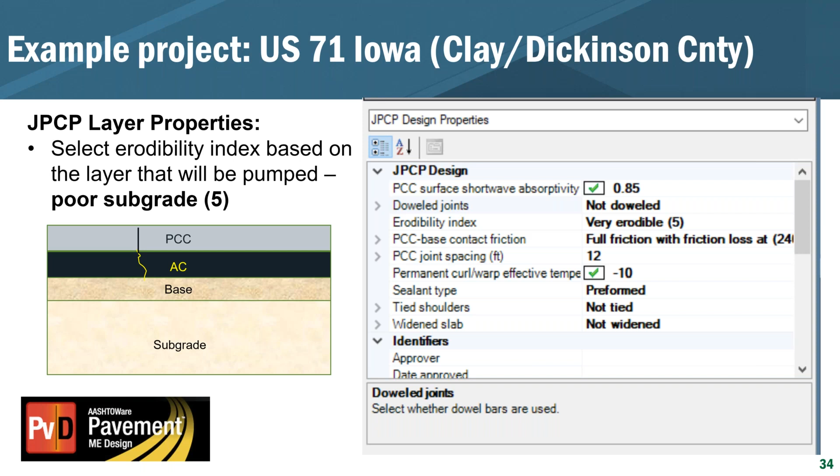Again, the subgrade underneath it was 50% fines. I used a really high erodibility, maybe a little higher than needed, but this is just a design example, so let's move through it and see where it takes us. And then also the full friction layer, as we had talked about previously.

So it was a 20-year design, so for a full 240 months, full friction was assumed based on what's suggested in the manual of practice. Then for the asphalt layer properties, this is where we want to account for the reduction in stiffness in the asphalt layer, which is automatically done based on the amount of fatigue cracking.

I assumed the fatigue cracking was adequate, so that would be 0 to 5%. I just put 'good' in this area, interpreting from another design procedure. So I put 'good' and entered the 3 inches being milled right there.

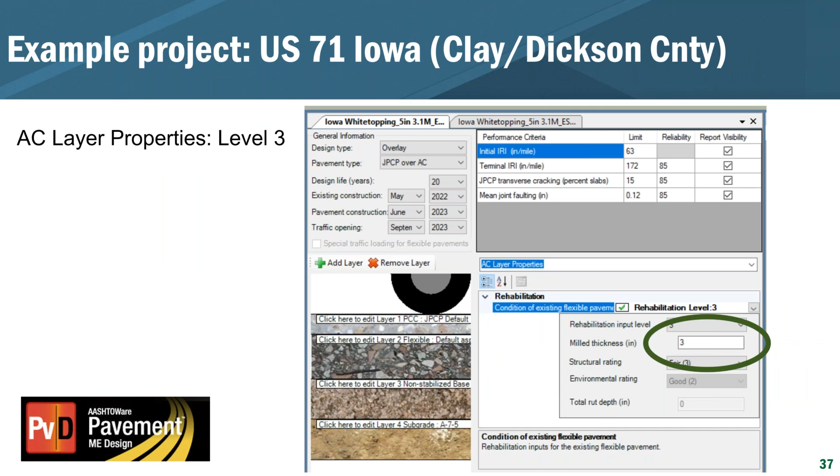Back to what we were talking about previously, the subgrade was defined as 100 PSI per inch, and we have to convert that into something Pavement ME can use. We also had to add another layer that acts below the flexible layer, because Pavement ME requires 2 layers below the flexible layer: the subgrade and one additional layer.

So with a K value of 100 PSI, obviously that's not great subgrade. I selected a non-stabilized base for that 3rd layer and used the worst possible soil classification I could, which was an A-3 under the non-stabilized base layer, and then the worst possible resilient modulus for an A-3, which was 10,000 PSI.

And then for the subgrade, that's where I tried to make things up. I used that 3rd layer, A-3, 10,000 PSI, and made it a thin 2-inch layer, so that stiffness only applied to a small thickness. Then for the subgrade, I got back to around where we should be, A-7-5.

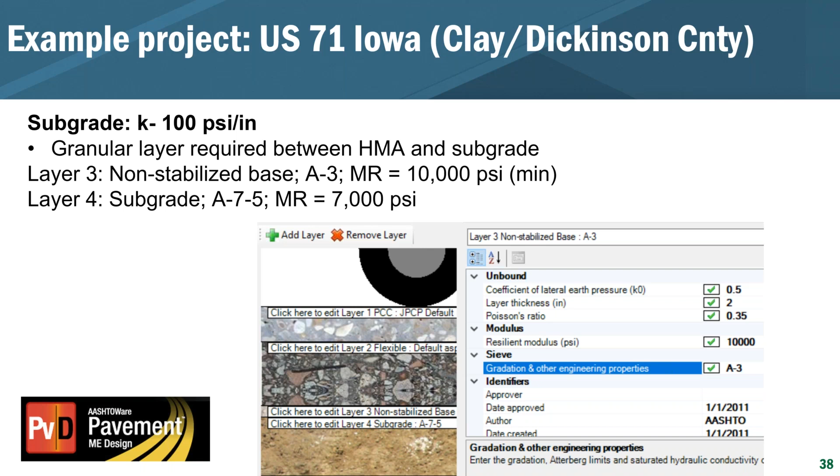Now, how do I find out if I was successful? If I can get this to progress forward, what I did was go into the supplementary files created by Pavement ME. If you go into the K value outputs, click on that file and open it in Notepad or something that reads a text file, it will give you the K value it estimated throughout the year.

In the spring thaw or recovery periods, it was a little bit below 100. For the majority of the year it's pretty close to 100, and then after that, a couple of months it's about 111, 112. So I figured this is probably a pretty good representation of that 100 PSI.

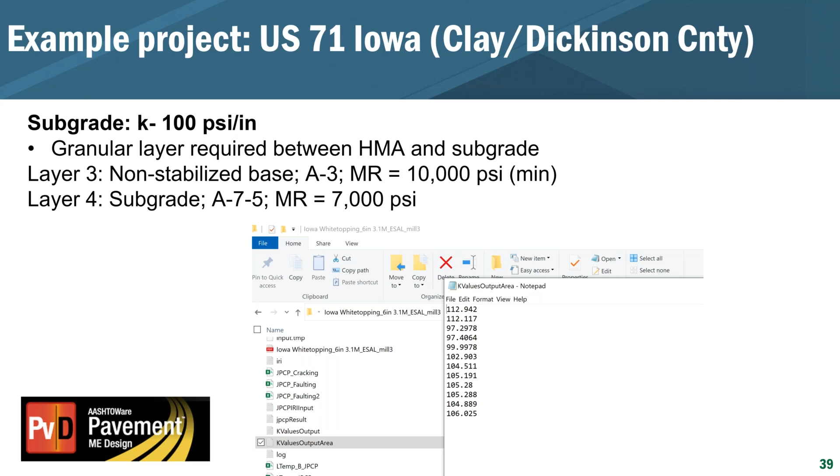This was actually my second guess at it, so you can iterate through. The first time the resilient modulus of the subgrade was a little too high, so I dropped it down to 7,000 PSI and got this. So the idea is that depending on the information you have, you can still use Pavement ME, you just might have to interpret the results a bit to make sure you're modeling the section that's actually out there.

All right, so moving along here, we have layer 2, which is the flexible asphalt layer, and that's going to be 8 inches of asphalt because it's currently 11.

As Chris and Ben had implied, it could be up to 3 inches milled off depending on the profile, so we entered in 8 inches. For the most part I did use the defaults, although I did enter the air voids, which was 7% and 7.5% effective binder. I also looked at what they use for their superpave mix, and I think it was a 58-34. So Chris and Ben, if that's not exactly what you'd use out there, my apologies, but I did the best I could based on your online documents.

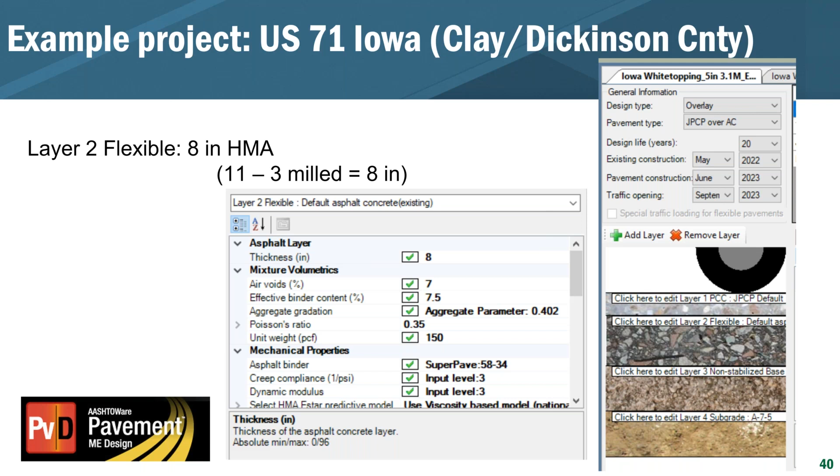So what are the results? Looking in those secondary output files, that traffic generated 3 million ESALs. I know ESALs are bad, but it gives me a number I'm familiar with. At 3 million ESALs, even when we were designing a 5-inch concrete overlay, which again is outside the inference space of Pavement ME, it recommends not going below 6. So with 12-foot joints undoweled, the faulting criteria was just outside where you'd want it to be, but the cracking was negligible, 0.78, so not even 1% of the slabs cracked.

So what this is telling me is that a conventional design probably wouldn't be the right option. Chris and Ben also did a design using the '93 guide, modeling it as a new pavement on top of an asphalt base, and they got 6 inches for that. So again, it's a little bit lower.

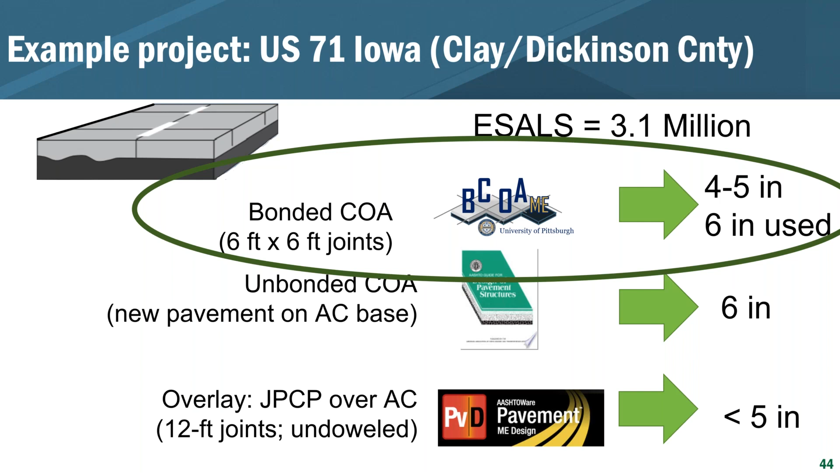What Chris and Ben did was they used the BCOA, and they were using 6x6 joints, so they got 4 to 5 inches. I had mentioned previously it was a 24-foot wide section, so they wanted to do a 6x6 to make sure they had the exact section width. So the 6x6 worked out well for them, and I believe they ended up going with 6 inches.

So that doesn't get us where we want to be with the conventional pavement. So I just jacked up the traffic to get us to the point where a 6-inch overlay, designed exactly as we had talked about before, the only thing I did was jack the traffic up. So now instead of 3 million, we have 30 million, and we had about 3% cracking at that point. I just wanted you to focus on the cracking, because this is all about the cracking at this point.

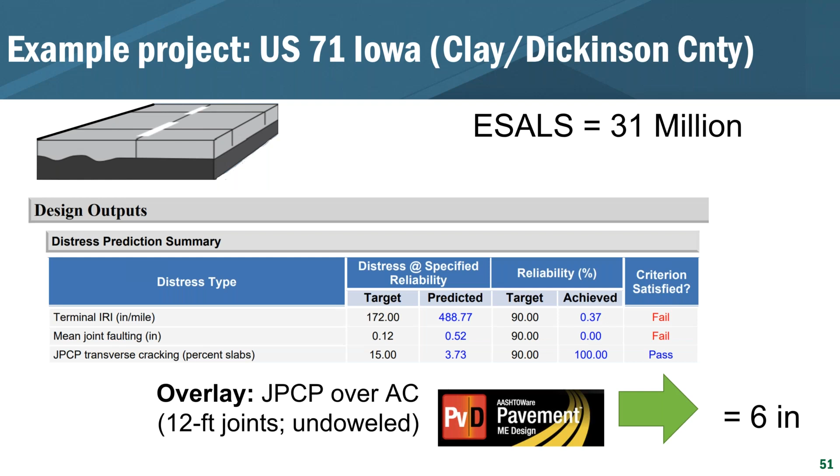So then the next question that came to my mind was, what if I did design this as a new pavement? Remember, the new pavement is the same in the sense that it's treating the structural response calculations, the stresses and strains and all of the deflections, all modeled the exact same way. The only thing that's really changing per se is the stiffness of that asphalt. So if you had a pristine asphalt, how would that look?

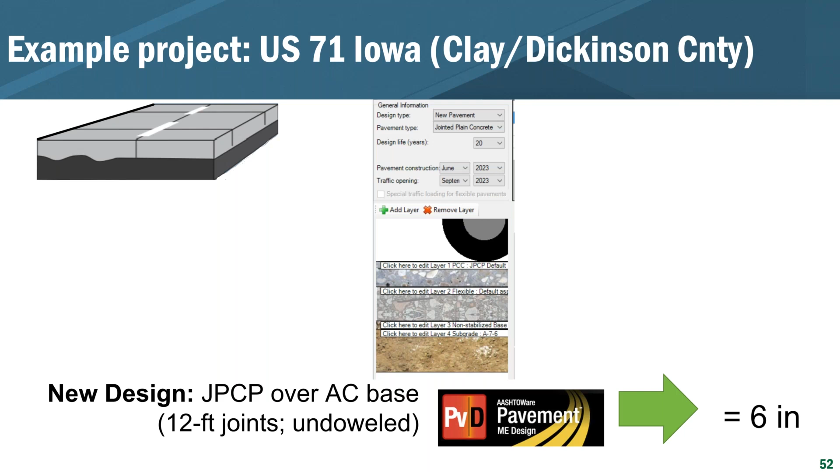So here I do a new design with a concrete pavement, a jointed plain concrete pavement on top of an asphalt base. I still use the 12-foot joints undoweled—if I threw in a dowel, of course, that would disappear, so I'm not really concerned about that. I also use the most erodible layer, and your faulting is extremely sensitive to the erodibility of that layer, so I'm not too concerned about that either. But then when I do the 6-inch overlay with the new concrete, I go from 13 to about 2% fatigue cracking.

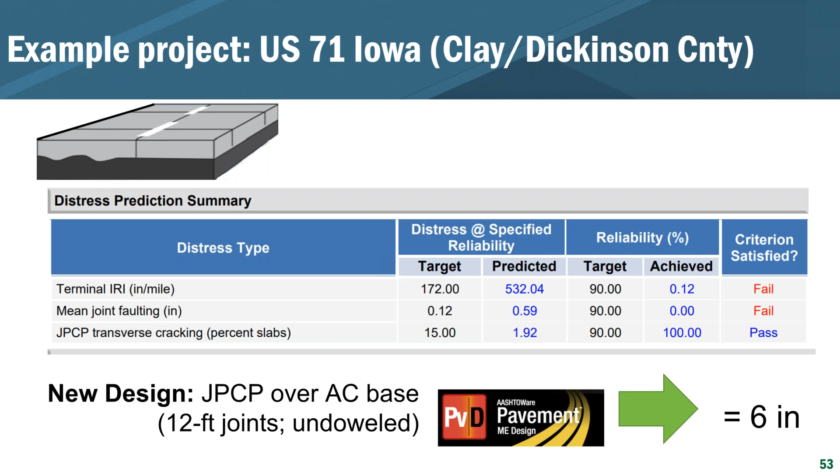Even if you have asphalt in excellent condition, you do get some reduction in stiffness, but it's still not as much as with a concrete overlay on top of asphalt. So here, again this was excellent condition, 3, and then a new pavement, say 2. Are they that different? No, they shouldn't be. So to me, that makes a good check on how pavement ME is working, and gives you additional confidence in its ability to predict performance, or at least it did for me.

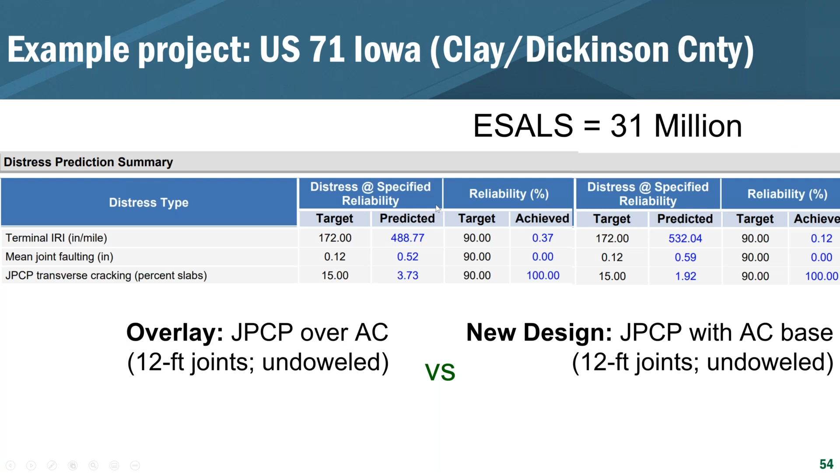That's all that I had, Kurt. I think I'm about 5 minutes early, but I tend to talk a little quickly. So we probably have time for questions, right?

We do. Thank you, Julie, very good information. I think it's important for everybody to get a better idea of how to proceed with some of these PCC overlay designs and what particular strategies to use. We did have a few questions, so I'll go ahead and bring those up.

Let's go back to the first one. Does new AC that is less than 3 months old have the same bond and frictional properties as a year or two old AC? Yes. There's been some research on that. I think as it oxidizes you can increase or enhance the bond. Also, if you're milling it, that makes a big difference in the resulting texture. But then again, the question I'd ask is how much bond do you need, especially if it's a conventional white topping? You're relying on friction in that instance, not bond.